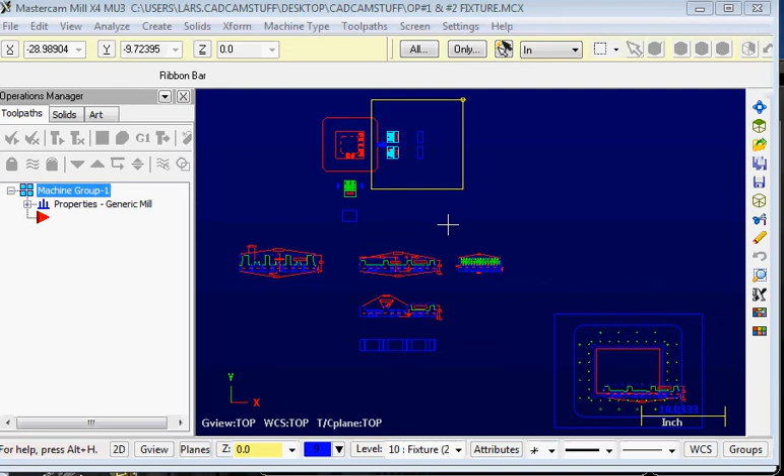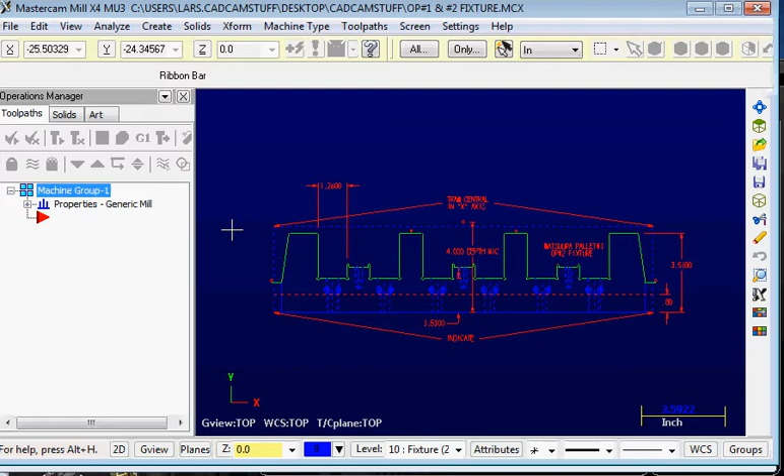Many of us have geometry saved in Mastercam that goes way beyond the years we've been playing around with SolidWorks, and from time to time we find that we want to use some of this geometry inside SolidWorks. I'm kind of lazy, so instead of analyzing a line, flipping over to SolidWorks, drawing the line in, and going back to Mastercam to analyze, I'd rather just take the geometry here and bring it right into SolidWorks and extrude from there.

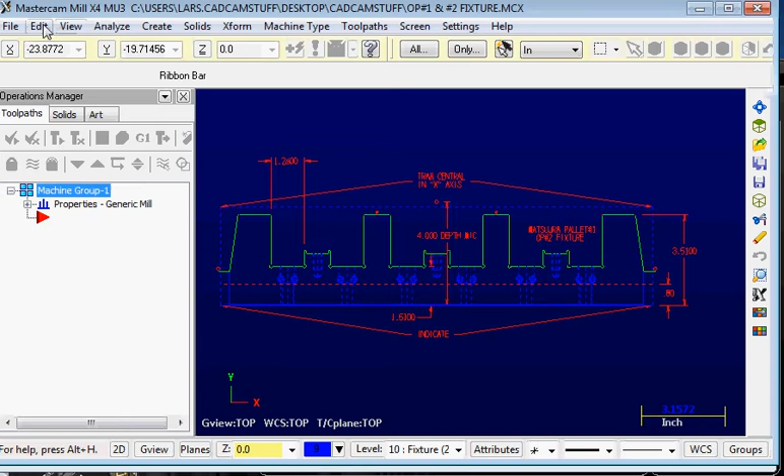So I've got this geometry that was used to wire out some fixturing in Mastercam Wire back in the day. Basically what I did was get rid of some of the dimensions, some of the text, and some of the hidden lines that we don't really need for anything, turning it into just the pure geometry of the shape that I want to use. I then deleted everything else, so now I just have this geometry here.

I can then in Mastercam go to Save As, and in the drop down we've got DWG, the AutoCAD format, and just like in the previous video about bringing your solid model from Mastercam to SolidWorks where we picked Parasolid, with DWG Mastercam also gives us an option to save it back to an older format, which is pretty cool if you've got an older seat of SolidWorks.

When I open up SolidWorks and bring this in as a DWG format, I get prompted with the DXF DWG import screen that asks me to decide: do I want to turn it into a drawing, or do I want to turn it into geometry, which is what we're going to pick here.

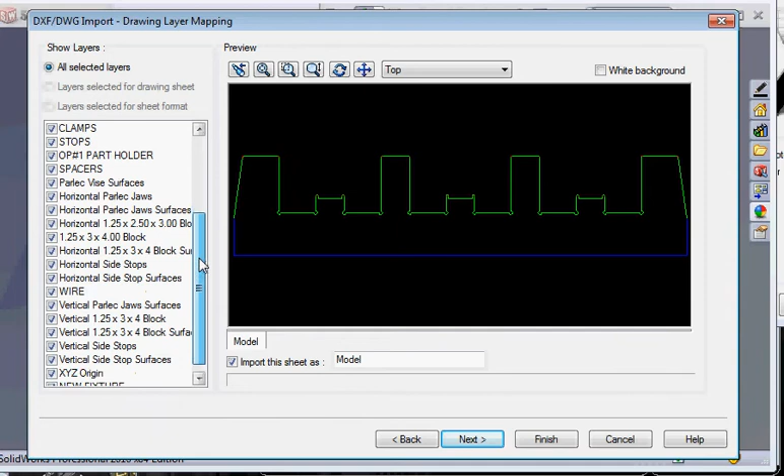If I click next, we'll see something that looks very familiar from AutoCAD, the different layers and stuff like that. We can also set some tolerances here, and set that we want a 2D sketch. As soon as I click finish, it's going to make a calculation and bring us in the sketch.

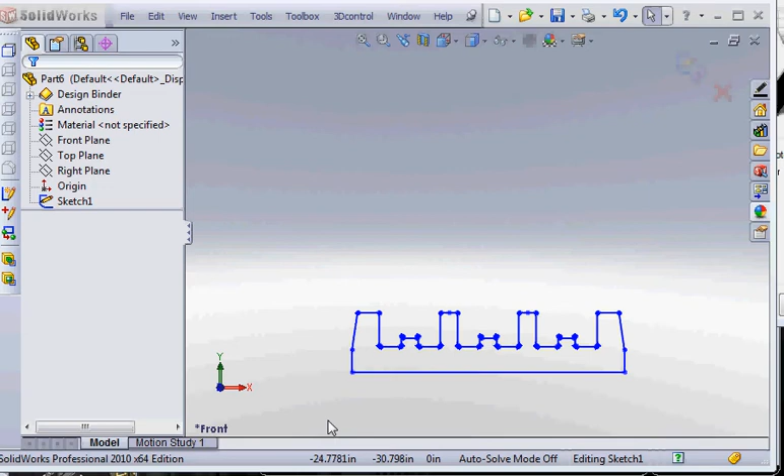When we bring the sketch in, it's not defined, so it's got to be defined. Again, depending on what you need to do with this model, do you want to take the time to sit down and dimension things, constrain things to the relationships it really needs, or can you just pull a quickie, right click, and say fully defined sketch, letting SolidWorks just tie it all down so it doesn't move around, and quickly be on your way?

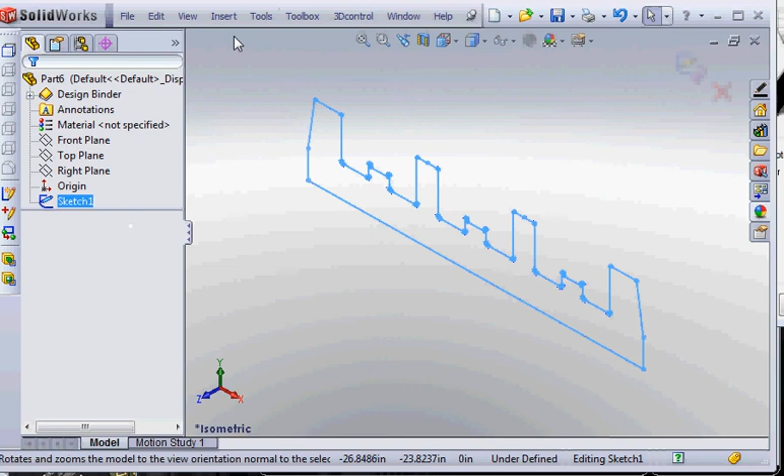Again, it depends, just like in the last video, on what the purpose is. But this is a perfectly good sketch that I can go ahead and extrude out pretty quickly, without having to do any measuring at all. Here I've got my fixture as a solid.

So that's a quick way to bring in your geometry from Mastercam into SolidWorks.